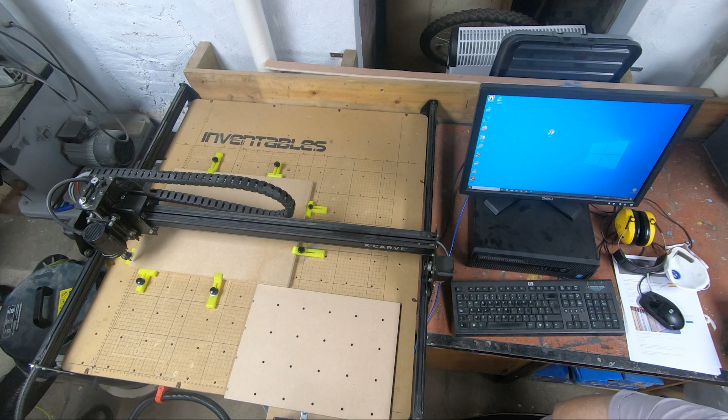Right, are we ready to begin, gentlemen? Okay, I've already powered the machine up because occasionally it wants to do updates every now and then, so I got to this point without you.

The login for Easel is right in the middle of the screen, you can't really miss it. We've gone down the Easel route because it's very easy. If you have experience with this sort of stuff, there's nothing to stop you bringing G-code to a different system, which we can talk about later. But Easel is dead easy, and you can get something out fairly quickly.

So we'll fire up Easel. It takes a minute or two. It's an online system, so it lives in the cloud, so it can just take a minute or two to get to its happy place.

I got ahead and mounted this already, but obviously when one is cutting, one needs to mount it extremely securely. There's a mixture of clips - little finger clips to hold it down and flat end clips to hold it - and these are all threaded, so you can usually find a place. There's a box of different length screws for different thickness materials. So there's various other bits and fittings there.

Washers and things. If you intend cutting all the way through, this is a sacrificial board. It doesn't have any threads in it, but it matches up with this, so to save making divots in the base, please use that. I can always generate more of those if necessary.

So I'm not going to cut right through, this is pretty chunky, so I'm just going to go with that.

Login - it's a shed account, so the login details are already in there and shouldn't get forgotten, but you haven't noted them and Hamish hasn't noted them if necessary. So at this point, continue. The password is already in, it knows it, so it's going to remember it.

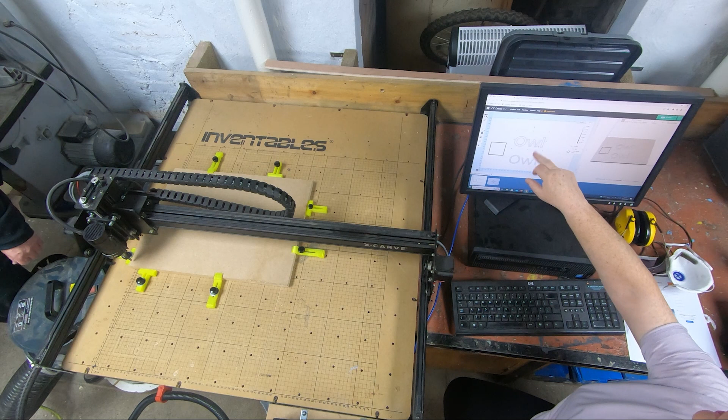Oh, you've done that there. I've done it there by changing the cut path here - I've changed the cut on a shape path, but it will depend. As Kenny says, you may need to do it in individual letters.

I'm happy - that's lucky because it's quite simple lettering. Yes, if it was complex lettering, it wouldn't like it.

So there's a bit of a learning exchange there. Everything you're doing on the left is mimicked on the right, and sometimes you think it's not showing - that's because it's decided it can't do it. Yeah, if I was to reduce that down, it'll go.

I'm not sure about that. It will show this - a bit's missing if you- and it's just because the tool can't cut that. You have interesting text effects if you really want them.

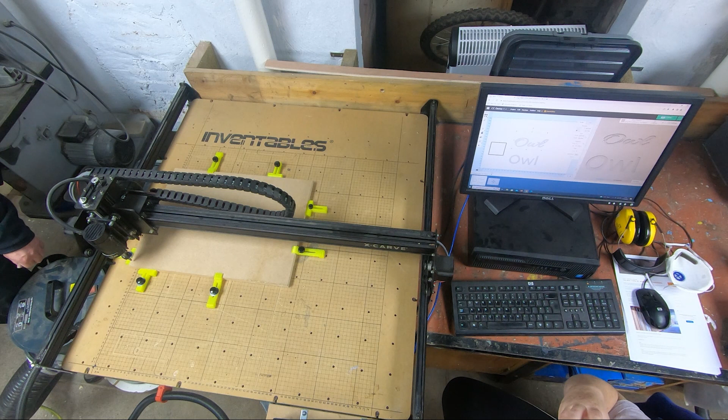I was just going to change it. If you start giving it funny characters and things, it starts to get a bit unhappy. Actually, it's coping not too badly, but not totally. So you just need to check what it's doing - if it really hates it, it'll go red, meaning it can't do this. As we're learning, some materials will take better cuts than others, so it's very much a combination of how it all goes together.

I'll just leave that there and take it out of the way. So once you have your wonderful text, design, house name, whatever you fancy, this area is where you set up what you're cutting on. This is all covered in the notes as well if you can't see it clearly here. There's a few copies, but I'll also put a PDF on the user group so everyone can download it.

So I've got it set to birch plywood - I'll change it to MDF, and it's 18mm because I happen to know that. You can give it its dimensions too, which I'll do since I haven't yet. So you have to tell it what the wood is, what size the wood is, and how thick the wood is - that goes into the little dimensions box.

That just allows you to see what you're doing. This is obviously quite a big bit of wood, but what that does on the right hand side is make the mimic of the bit of wood become the size and shape of the piece you've clamped down - not the full worktop, but your actual work area.

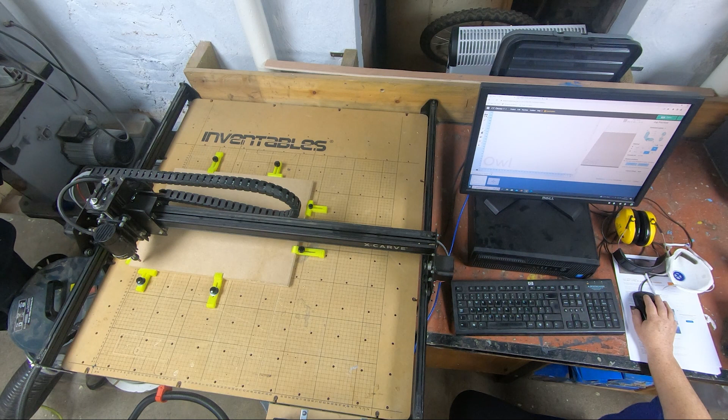This is a sort of nudge control - you can nudge it by 10, 1, or custom amounts: 10 or 0.1 millimeters, 1, or 0.01, so you just select the increment.

Now, caution, warning - this machine does not have limit switches, which means if you're parked there and tell it to move left by 2 feet, it's going to go crash into the edge and rip the hell out of the belts.

Also, if you've got things holding down material that are higher than the wood you're cutting, it'll bash and clatter into that. So you need to be a little bit alert and know what you're doing.

So it's a dumb machine - has that safety issue ever been tried and tested? Not 2 feet, but has it been tried and tested?

When we received the machine we got a load of belts, and I thought, oh excellent, spare belts. No - they were all wrecked ones from someone trying to move it beyond its physical limits, and it just chews the hell out of it. It's quite brutal when it gets going.

That's why this has to be screwed down really tight, otherwise it will just come loose.

So how do you limit it when you're getting it going? You just watch it. Once you've set things up, you have to be in control - it's not in control of you. You have to make sure everything there is right.

The speed, everything in the right layout. Obviously if you're this close to the edge, you don't tell it to move 5 or 10 centimeters at a time - you use 1 centimeter or 1 millimeter at a time, just nudging it.

I'm clicking on these buttons here - I've got X and Y controls, and I can change how much it moves by. So if I wanted to go scooting across somewhere, one click moves it that far because I changed the setting to 100.

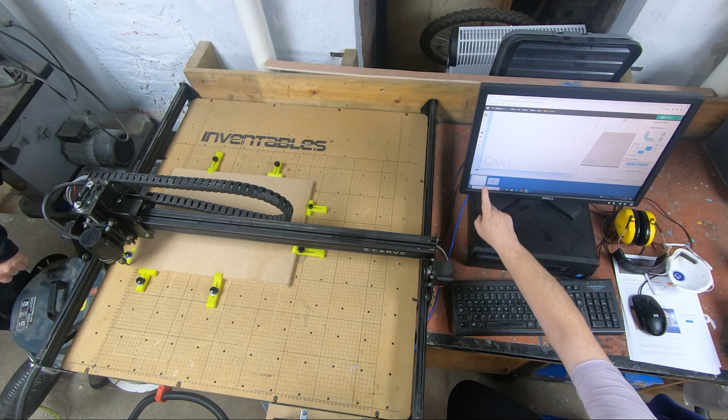Okay, it's just touching the wood. So it's just touching, and that's your start point for getting going. So now the machine knows where the corner of the wood is, how big the piece of wood is, and it now knows that 0 matches where that is.

That's where the O is going to be, because I've got space round about it. However far you've moved it on the screen, if I move it across, we'll move it over here. It's going all the way across there, which I don't want to do to waste the wood, so I'll put my O back there.

When you're comfortable, all set, and you've triple checked it, click the big green button this time, and that brings up this wizard which takes you through confirming everything. So yes, we're happy the material thickness is good, we're happy it's secure - you are happy that's secure. Well, I wouldn't say otherwise, the wife even put it in, trouble as it is. I'm happy I've got the bit in.

Now we get to the noisy bit very soon. I'm saying use new position because that's the new position I've set as my work 0, so you have to set the work 0. That's it, letting the machine know everything's ready to go. We're at the 0 point. It says almost ready to cut - raise the bit, so it wants you to raise the bit, which it does automatically to say, right, I am now ready to go. Turn on the spindle.

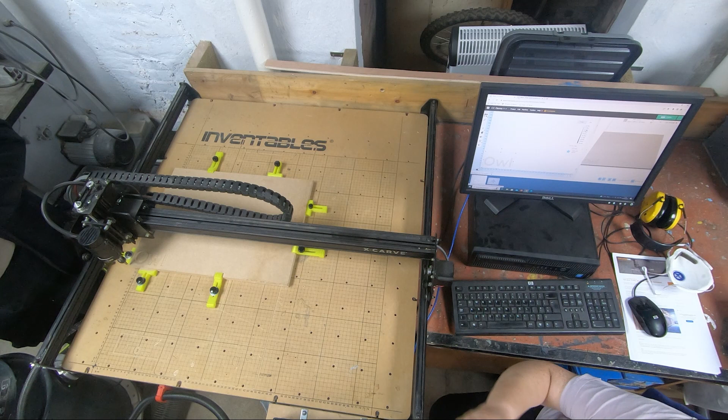You tell it how deep to make it - yes, I told it in this bit here when I had the owl selected, I told it just to go 1 millimeter deep. But obviously you can go as deep as you like. I didn't want it to take 3 hours to get that down there. So yes, there's a huge combination of how deep and MDF, but that's the combination you have to do.

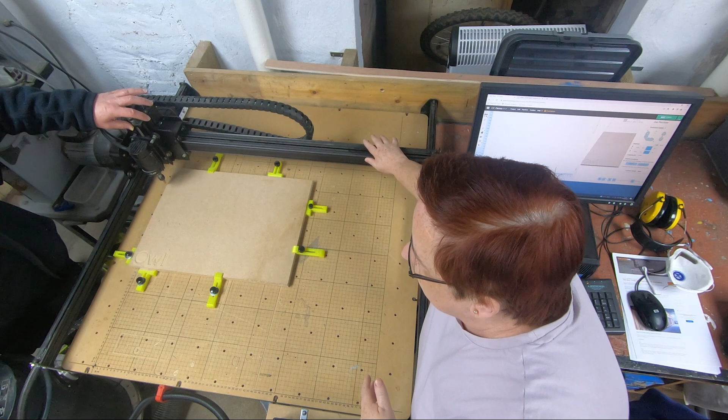Okay, to get this out the way, either I'll use the nudge to turn it, I'll nudge it up, or you can just literally turn the power off. Okay, we're done with it just now. So turn the power off - that then unlocks all the motors so you can move it by hand. You can just gently move it by hand, don't rattle it up and down too fast. Let me just briefly take the gunk out of it, soak it.

Take all the guff off it. I'll take it out. It's just MDF you're cutting, so you've got to be a bit careful with it - it's just cheap or something we had lying around.

I'll 3D print a hood that goes over and holds that, or something equivalent, over the cutting. MDF is fine, it suits it all, so you don't need to do anything - it'll travel around with it, it'll travel with the plan.

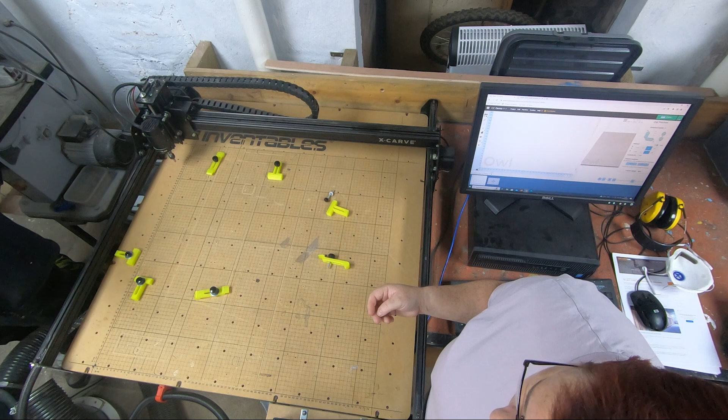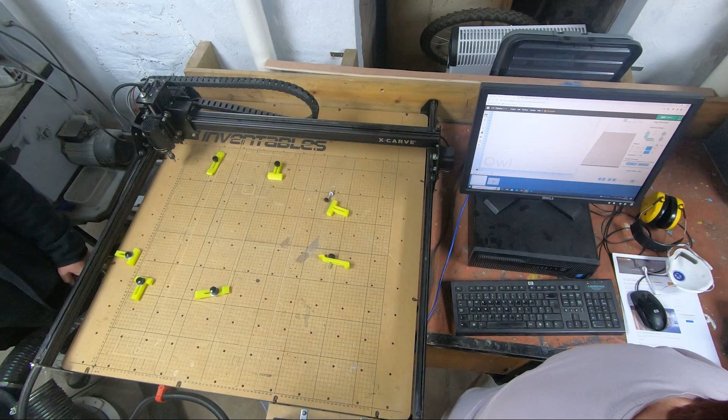Can it cut plastic? Yes. Can it cut brass? I don't know, probably not. No, not that I know, yeah - plastic, wood, MDF, laminate, yes. Metals would be - I think that's probably aluminium, you might be able to engrave on the surface, but you wouldn't be able to cut. It's not powerful enough for that, not with that spindle on it. No, I mean you can upgrade the motor to a heavier duty motor, get a Makita head for it, things like that which are better, and also upgrade the belts to a bigger, thicker belt, so it's got more punch. Yeah, I did, yeah - Amazon.